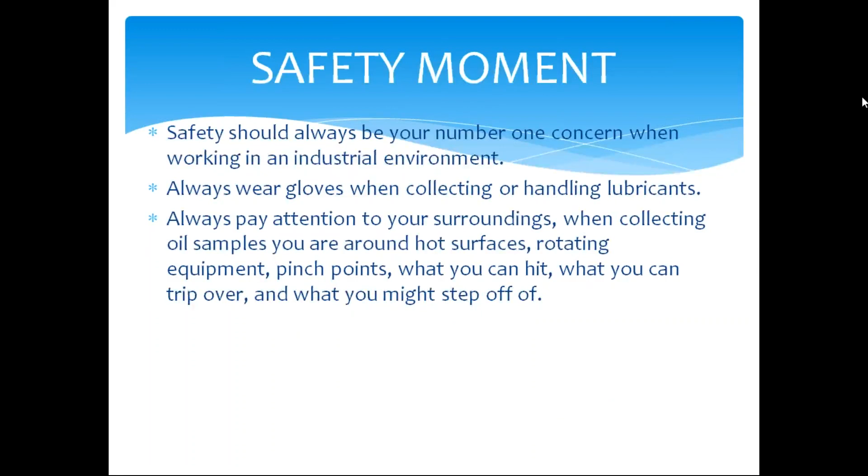Always pay attention to your surroundings. If you've got hot surfaces, rotating equipment, pinch points, things you can hit, things you can trip over, things you might step off of. Just because it was good last month when you pulled a sample doesn't necessarily mean it's good this time. And basically, don't multitask. And finally, the most important thing is that no sample collection is worth an injury or an ounce of your blood. If you can't do it safely, modify it, change it, or maybe it's not worth collecting.

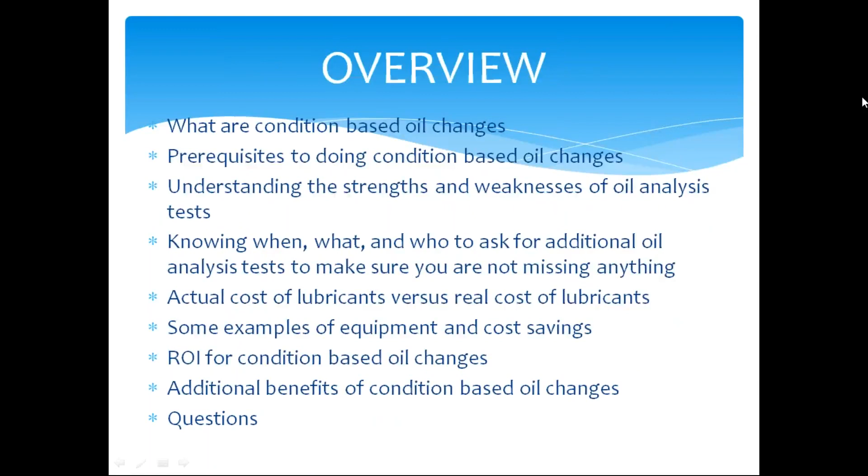So what types of oil changes do we have? Well, we have the reactive type. That's the oh my God moment when it looks like a milkshake because you got water in it, or you got foam coming out the top of it because somebody put the wrong kind of oil in it. Even with the best lubrication program in place, you're still going to have some reactive moments and reactive oil changes.

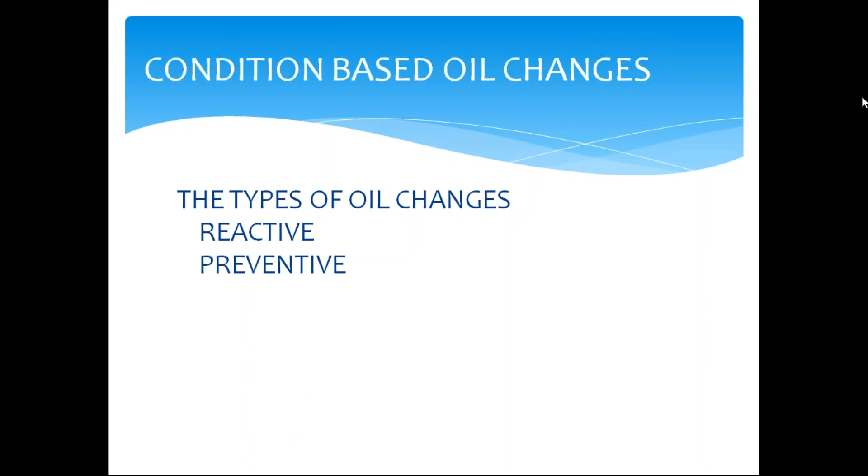We have the preventive oil change. These are your PM, either calendar-based or time-based hourly-wise, usually established by your OEM to err on the safe side. They're a very good use. However, they can be kind of wasteful at times because you may have redundant equipment that may not have even run since the last time you changed the oil in it.

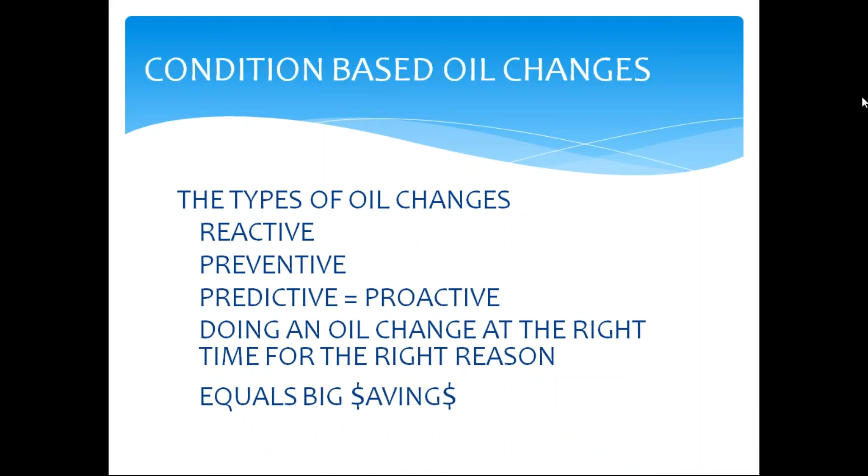And then we have predictive and proactive. This is using all of your information that you're getting out of your oil analysis report so you can do an oil change at the right time for the right reason, and that can equal big savings, once again, if done correctly.

So, condition-based oil changes are not to be taken lightly. Now, I'll repeat that again, are not to be taken lightly. You can end up with big cost avoidance or catastrophic failures. Nobody wants any catastrophic failures to their name.

You've got to have a champion over your program, somebody that understands all the information on your lube analysis report, not somebody that just reads the manager's reports and goes after the yellow or the red highlighted ones. You've got to really pay attention to how things are working out. Your additives, if they're depleting properly, oxidation levels, acid levels, and such like that.

Not all equipment is going to be a candidate for condition-based oil changes. Sometimes you've just got bad actors. There's nothing you can do with them. Sometimes you've got totally nasty environments that no matter how well you seal it or put breathers or anything on it, you just can't get them cleaned up.

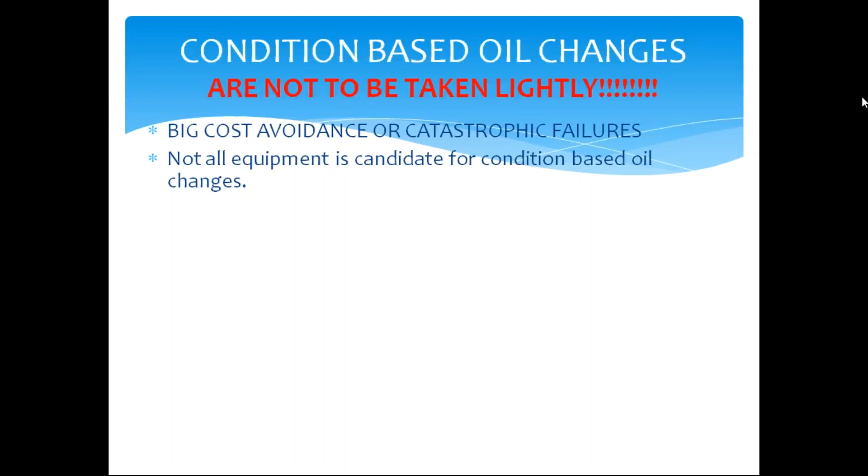And very important, if you have any new equipment, always ask if it's under warranty if you can do condition-based oil changes without voiding the warranty. Probably 9 out of 10 times when I've asked, there's usually not been a problem. Sometimes I've had to show them that we had an oil analysis program, some examples of what we're doing, and I always got an email in writing to document for later down the road if something did happen.

You've got to have proper sampling techniques. It's kind of like a computer, garbage in, garbage out. If you don't have good results and good analysis and good information, it's very hard to make good decisions. Some trend information before you get going is always a good thing to have. It'll help you make a decision if it's a candidate for condition-based oil changes. You'll find that you have some equipment that never has any problems. They're good actors. You rarely have any reactive moments.

And when I first started doing condition-based oil changes here at the plant, it took me probably about 3 to 4 years to get most of the equipment into condition-based. Start out with a small group of good equipment. Make sure you always get buy-in from your engineers and your supervisors and stuff. Sometimes that's your hardest uphill battle, convincing them and showing them that this can be done and save lots of money.

It helps to know and understand the internals of your equipment and what kind of materials are used in it. Obviously, if you start getting tin showing up, or lead or iron or aluminum, you need to know. It's very helpful if that is something that is within that piece of equipment, so you can know what it is and what might be causing it.

And you've got to have a proper slate of oil analysis tests, and sometimes you're going to have to perform special tests periodically to make sure you're not missing anything. Now, I'm going to throw a plug in here to help you out and to help out your oil lab, whether it's on-site or off-site.

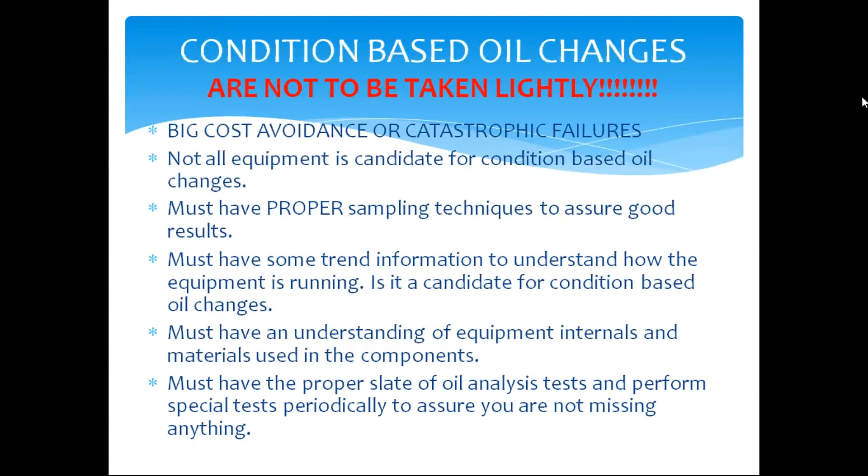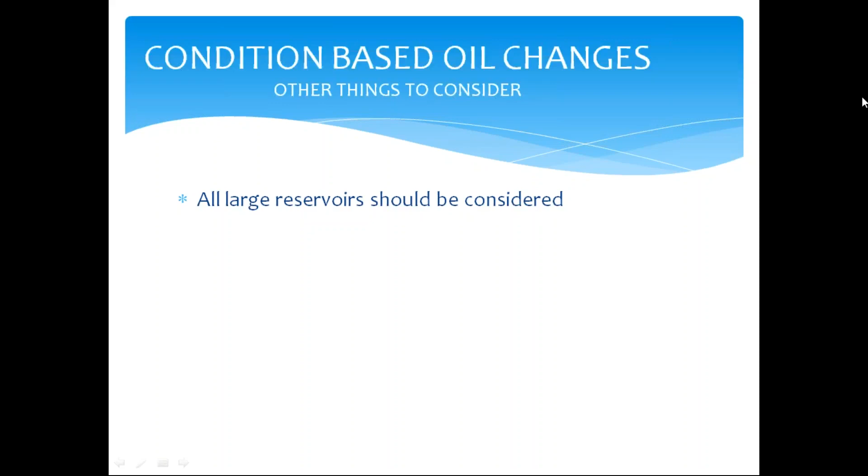So other things to consider on condition-based oil changes. Obviously, all large reservoirs should be considered. The larger the amount of oil, the larger the volume, the potentially larger savings you can have. However, if you're sampling smaller reservoirs due to criticality of the equipment, an example of that would be our large 6.9 kV oiled motors here at the plant.

We monitor those for sleeve bearing damage or anything else going on. Some of those may only have a gallon per end. However, you've got all the information right there in your oil analysis report. Why not include them as well?

Makeup oil and oil additions. Everybody usually has a leaker, something you just can't do anything with. Generally, if you do 25% makeup oil of the correct makeup oil, it's considered to help sweeten what's already existing. Now, obviously, if you've got something that's totally trashed, 25% is not going to do you much good.

Quick little side note on that. One of the first cars I had when I was a kid, I put a tank of gas in it a week, and I put a quart of oil in it a week. I never ever changed the oil in it. I just changed the oil filter every 3,000 miles because I was continually changing the oil.

Operating temperatures. Temperatures can be a major enemy of lubricants. When you're thinking about temperatures, you've got to think outside the reservoir. Just because the lollipop temperature gauge on the reservoir shows 100 or 110 degrees doesn't mean that you don't have localized hot spots somewhere throughout the system.

It might be a relief valve improperly set that's got oil screaming over it that's generating all kinds of heat. It might be piston rings on a hydraulic cylinder bypassing that generate a lot of heat. You might have external hot spots that the oil is coming in contact with. And always think about your reservoir heaters.

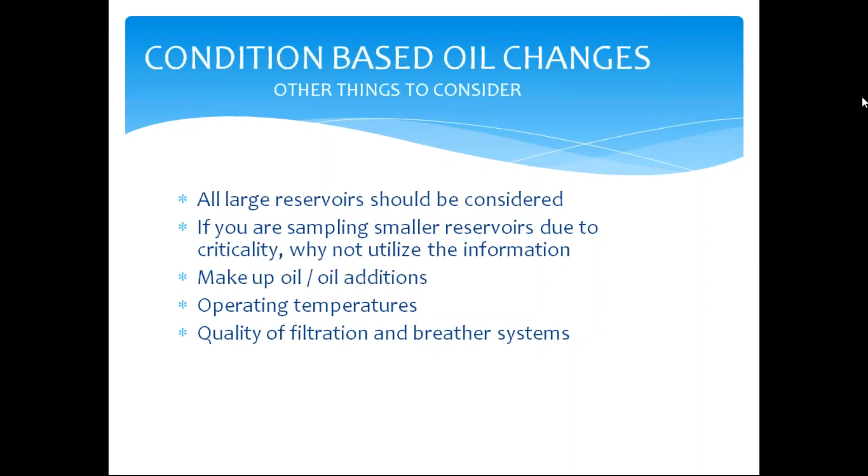When it comes to breathers, the standard screw-on cap that comes on most reservoirs is kind of like a screen door. It keeps bugs, rocks, boulders, big things out, but not really the problem stuff. Invest some money, go with some desiccant breathers. Not only will the desiccant help relieve moisture, like in the nice southeast where I'm at, but also it'll help keep your headspace dry. And most of your desiccant breathers out there have a 2 to 3 micron filter in them. So you'll actually be filtering the air going in and out instead of just running it through a screen.

Now, just because you're doing condition-based maintenance does not mean that you are going to be able to eliminate your preventive maintenance, your PMs. You're still always going to have some couplings to lubricate, some grease points to grease, some pressures to check, some operating speeds to check. There's always going to be something else to do, but you can optimize your PMs.

Our PMs originally were listed as lubrication or oil change PMs. Now they're listed as equipment PM or gearbox PM or hydraulic reservoir PM. So optimize them, but you're not going to be able to do away with them because there's still a lot of other things that need to be covered.

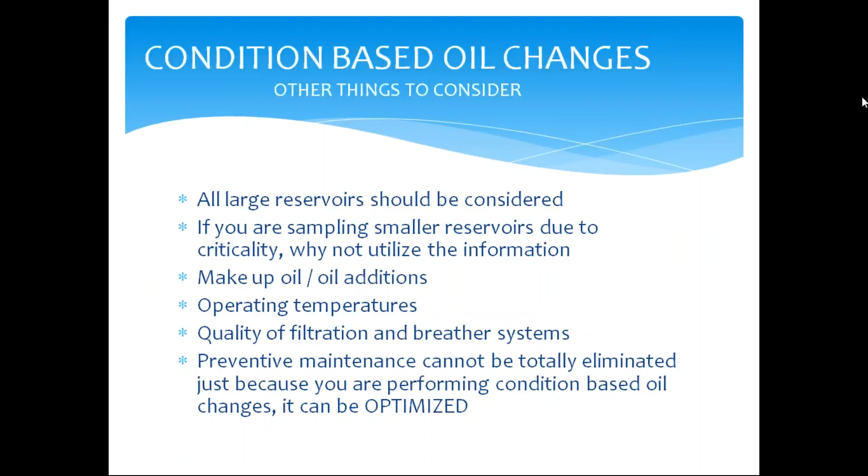Let's talk about a few strengths and weaknesses of oil analysis tests. Laser particle counters are widely used in the industry for particle counting. However, if you get air entrainment or dark oil samples or water that's not caught by the lab, you can get false positives and you can get wrong numbers. Some alternate tests that can be used are the millipore patch test, a wear debris particle analysis, or pore blockage.

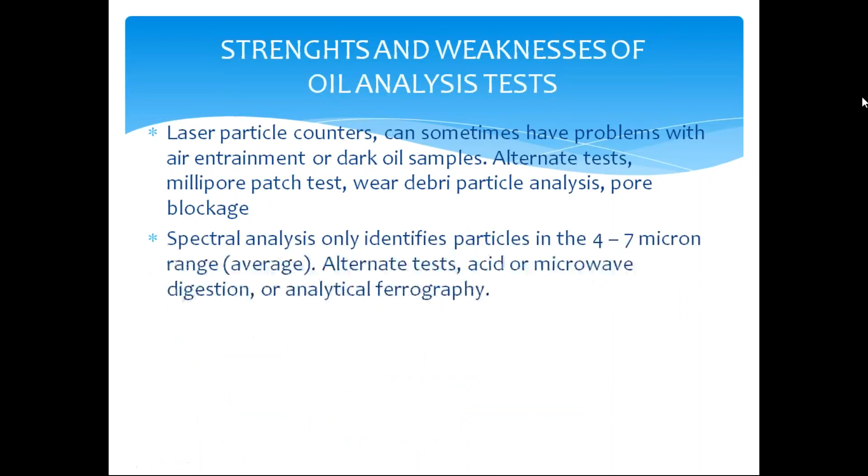Spectral analysis, another great tool on oil analysis. It gives you your additives and some of your contaminant metals. However, it's only looking at 4 to 7 micron particle size range. The human eye can see 40 microns, so we're talking about pretty small. Alternate tests for this, you can use acid or microwave digestion, which will dissolve or break down the larger particles into a particle size that spectral analysis can see, or you can do analytical ferrography.

Analytical ferrography is an awesome tool. You will end up with particles. You have a good analyst that looks at them. They can tell you if they're cutting or rubbing or scraping, or if they're new or if they're old, by doing morphology on the particles on the slide. So a very good tool to use, even if you're not looking at other things, but you want to know what's going on wear-wise inside your equipment.

Water is another major enemy of lubricants. The standard quick test, of course, is a crackle test or an FTIR. Now, I do know some lab techs that can get pretty on the spot with ppm or percent water with a crackle test. However, just knowing it has water in there in a ballpark is not really great information. If you need to know exactly how much water you have in it, you get a Karl Fischer titration done.

Of course, we have dissolved water, emulsified water, and free water. Different oils can have different levels of dissolved water, and Karl Fischer will show the dissolved water on top of the emulsified and free water. But the point being, certain equipment may be critical to get the water out. So if you need to know exactly, get Karl Fischer done. All of my lab analysis, if it has a positive crackle, it gets a Karl Fischer done automatically. That way I've got a number in front of me so I know actually what the water level is.

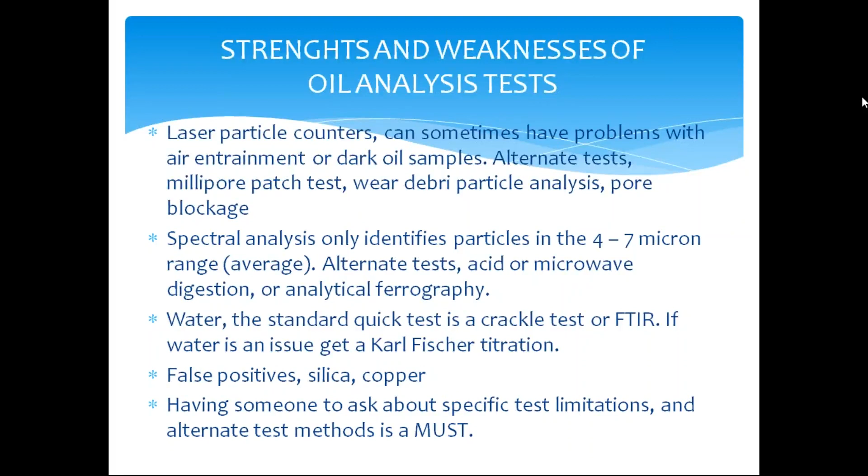These are some of the special additional tests that might need to be run while you're doing condition-based oil changes to make sure you're not missing anything. Your rotating pressure vessel oxidation test, the RULER, and the total oxidation stability test. These three compare a new oil, known value, to your used or current in-service oil to give you an idea where your used oil is at in its life expectancy, how much you've got left on it.

Varnish potential, which is your MPC, your QSA, or your VPR. MPC being the ASTM method, the QSA and VPR are very similar methods. Air and foam, we both know that air is not a good lubricant. As an oil ages, this could become an issue, so it's something you need to keep an eye on if you're extending your life.

Demulsibility. Most industrial lubricants are designed to demulsify or separate water. Therefore, you can drain a little bit out of the bottom of the reservoir. Unlike engine oils that are designed to emulsify a little bit of water. I'm not talking about the blown head gasket milkshake looking engine oil. I'm talking about the little bit of moisture you get every time you stop your engine and it goes through dew point. That little bit of water will actually get hot enough in the oil to boil out.

Rust and copper strip. These are corrosion tests. Total acid number, something generally associated with industrial lubricants again. Once it's doubled over the base, it's usually considered time to change it. Base number, something that's usually associated with engine oils and helps neutralize the acids that are part of the combustion process. Now, this is something that my oil lab turned me onto a couple years ago on my large diesel engines of running acid and base numbers.

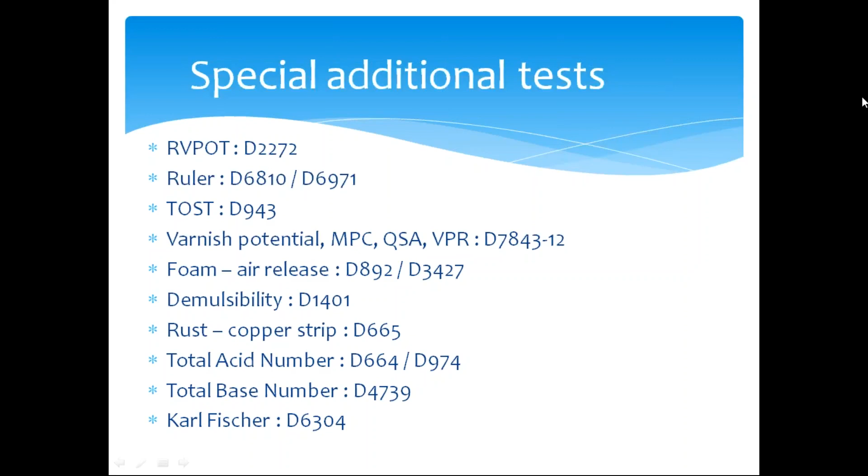So now we're going to talk about the actual versus the real cost of lubricants. The actual cost of a lubricant is what you pay the distributor per gallon, pound, pail, drum, however you receive it. Industry average cost for mineral oils is $9 to $14 a gallon. Now this was a highly scientific survey that I conducted. I called 3 friends of mine that are lubricant suppliers and got price ranges and came up with that.

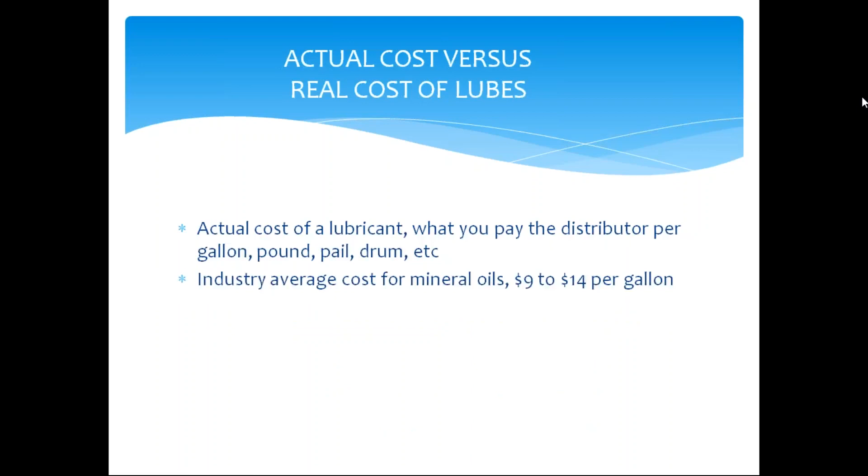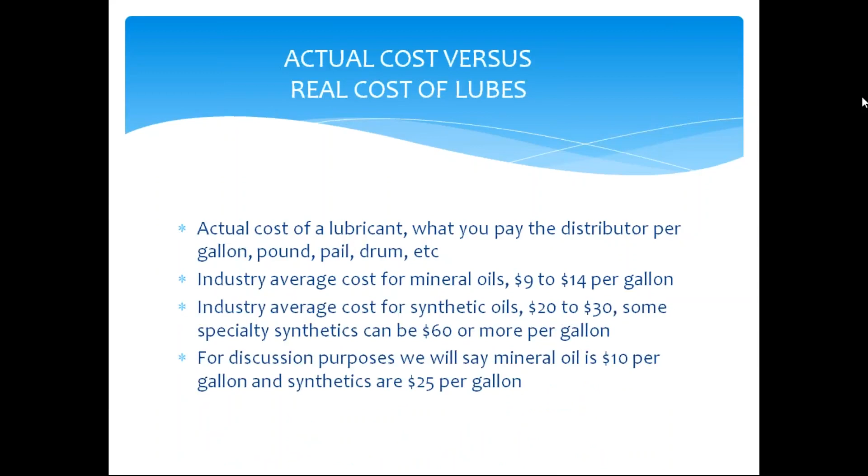Synthetic oils, $20 to $30 a gallon, and specialty synthetics can be $60 or more. Talk about specialty, we're usually talking about fire-resistant fluids and some of your silicone-based lubricants. So for discussion purposes, we're going to say $10 a gallon for mineral oil, $25 for synthetics. Now we'll talk about the real cost of a lubricant. This is the total cradle-to-grave cost once it hits your facility. Receiving, storing, dispensing, installing, and disposal. So the time it comes on till the time it leaves.

Now there was a Noria article several years ago, and I'll date myself because the magazine was still called Practicing Oil Analysis before it became Machinery Lubrication, that stated the average cost was 4 to 7 times per gallon and up to 40 times per gallon for contaminated oil such as radioactive. Now I've tried to calculate this a couple times, but it's very difficult because just because an oil change takes 15 minutes this time doesn't mean it won't take 3 or 4 hours next time when lockout, tagout goes wrong or a valve doesn't work or something. So it's really hard to calculate and figure out.

But since this is an old article, I generally go with 7 times cost per gallon. So for mineral oils, we're looking at $70 per gallon, and for synthetics, we're looking at $175 per gallon. Now remember, this is the total cost of the installation, the receiving, the storing, the whole package of it from the time it comes on plant site till the time it leaves plant site.

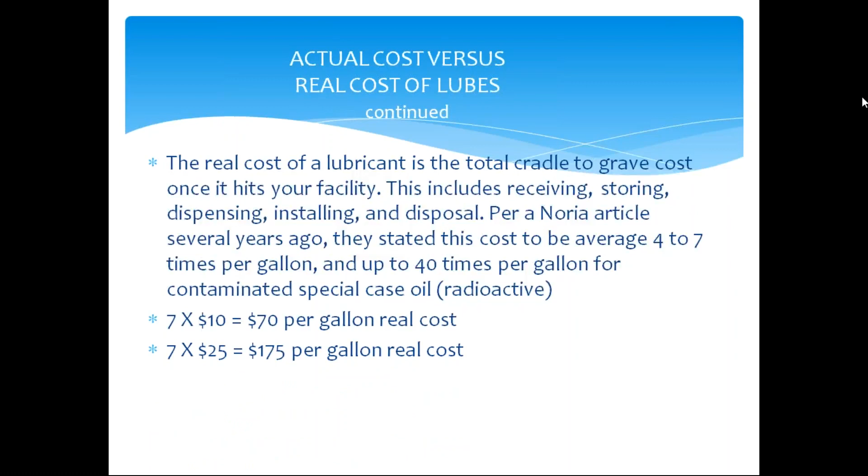The facility, as Carrie mentioned earlier, we were commissioned in the early 80s, back when coal was king. It is a 2-unit, 1,300 megawatt combined facility. We've had all of the emissions equipment that was available back in the 80s, and since that time we've added everything that's available with the exception of carbon capture. Carbon capture is not the problem. It's what to do with it once you catch it that becomes the problem in a large facility like this.

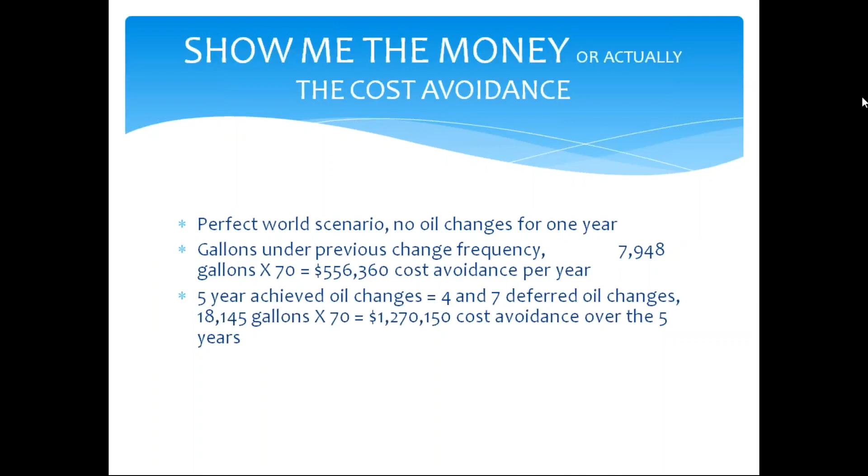Under the 5-year achieved oil changes, so you're deferring 4 to 7 oil changes, that's 18,145 gallons times 70. You're talking almost $1.3 million over a 5-year time span. And some of this stuff is extended into 8 years now. So there's quite a bit of savings available there. And of course, like as mentioned on the other page, the very large reservoirs are not included in the calculation.

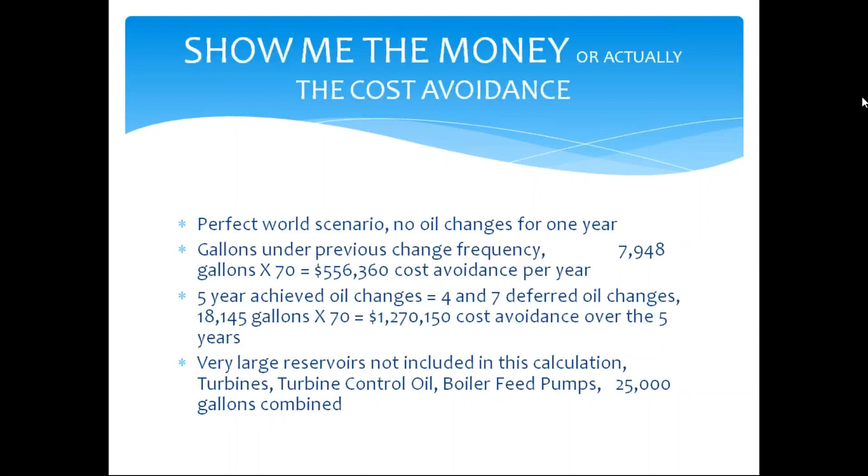So what's our return on investment for condition-based oil changes? On the previous slide, we had 792 samples per year collected on the condition-based oil change equipment at an average of $20 to $40 per sample analysis. Now this is another one of those highly scientific surveys. I called up 3 or 4 people I know that run oil labs and asked them their average price. So at $20, we're looking at $15,840. At $40, we're looking at $31,680 for the cost of the oil analysis per year on the condition-based equipment.

Salary of a person running the oil analysis program. I know that magazine Maintenance Technology usually does a survey once per year. I think Machinery Lubrication did one a while back. And they said that an average lube person running a program at a plant was $65,000 to $85,000 a year. So let's say $80,000 per person, plus $32,000, we're going the high end for oil analysis cost. You're looking at $112,000. Throw in another $60,000 for your personal package of insurance, if you're lucky enough to have that, and other benefits, your benefit package. You're now talking $172,000 a year.

Most likely, you already had the oil analysis program established before you started doing condition-based oil changes, so you already had that cost. So, should it actually be considered a cost? Or with everybody wanting to cut out programs and downsize nowadays, should you be promoting it as a justification to help fund your oil analysis program? $172,000 is significantly less than $556,000 savings per year. So use it to your advantage and promote your program.

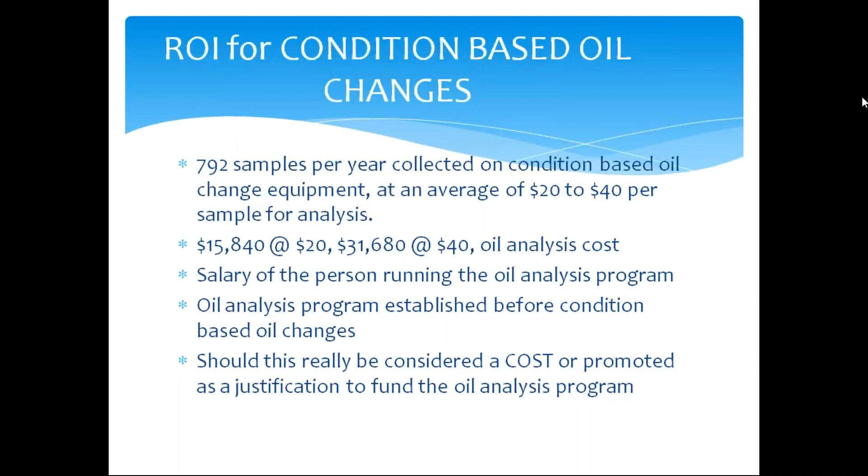Some additional benefits of condition-based oil changes. Obviously, we'll have reduced environmental impact because you aren't going to be requiring any new lubricants. And you're obviously going to have reduced disposal of used lubricants.

You're going to have reduced human intervention. Anytime you get meddling fingers start working on something, there's always the possibility that something's left out or something's not right when you get done with it.

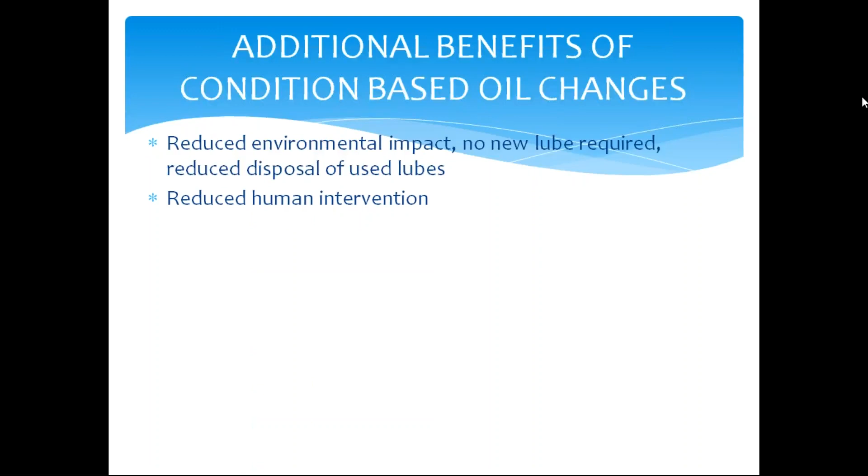Freed up man hours, the hidden workforce, to perform proactive work on equipment that needs it. Now instead of however many people doing arbitrary oil changes based on PM needs, those people and their hours can be used on equipment that needs to be worked on to help you get things more reliable and make them last better.

You have reduced cost of unnecessary filter and breather changes. Under some of our old PMs, even though it was a duplex filter, they only needed to service or change the one that was in service. The other one was never used. They would change both filters on it. So now you're throwing out a filter that wasn't at its full capacity yet, and you're throwing out another one that had never been used. And some of these filters we used to change are $200 to $300 a piece.

When it comes to breather changes, sometimes you might do a little bit better, sometimes not. And always remember, if you don't have a duplex filter set up, well then if you got a PM, you might need to change the filters just to be on the safe side so you don't have to worry about taking the equipment back and taking it out of service to change a filter on it later down the road. So always use common sense with this as well. You've obviously got less chance of the wrong, incompatible, or worst case scenario, no lube being returned to the reservoir.

Reduced sediment stir up in the sump. Remember, the sump has basically three purposes: cooling, air release, and sediment settling. If you change the oil, the best time to do it is when everything's hot. Well, normally with lockout tagout procedures, that's kind of rare, to catch something when it's hot. Now you drain the oil out of it, you pour new oil in, and it goes down to the bottom and stirs up all the sediment that's been laying there minding its own business in the reservoir. And now you've got something that either has to be filtered back out or that's going to have to settle back into the reservoir.

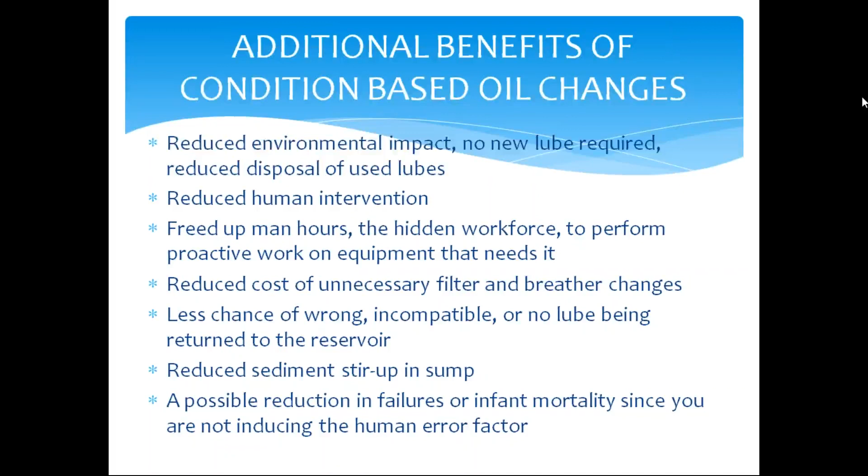So instead of just lying around doing nothing, why not try to stand out in the crowd? And you can start working together to create your own cost avoidance and possibly save your company a fair amount of money as well.

So with that, I'll close with a quote. I don't think we get smarter as we get older. We just run out of stupid things to do.